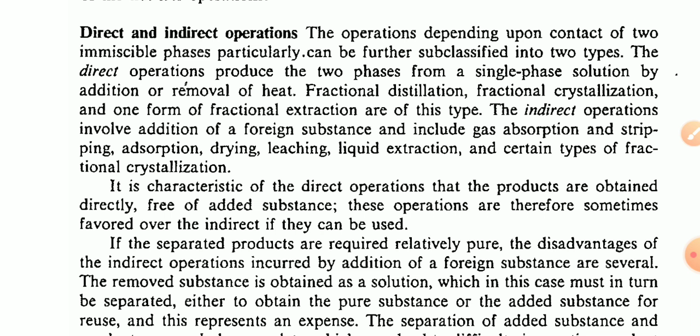It is characteristic of the direct operation that the products are obtained directly, free of added substances. These operations are therefore sometimes favored over the indirect if they can be used.

In any case, addition of foreign substances may add to the problems of building corrosion resistant equipment, and the cost of inevitable losses must be borne. Obviously the indirect method is used only because it is, in the net, less costly than the direct method, if there is a choice. Frequently there is no choice, it will come down to the basis.

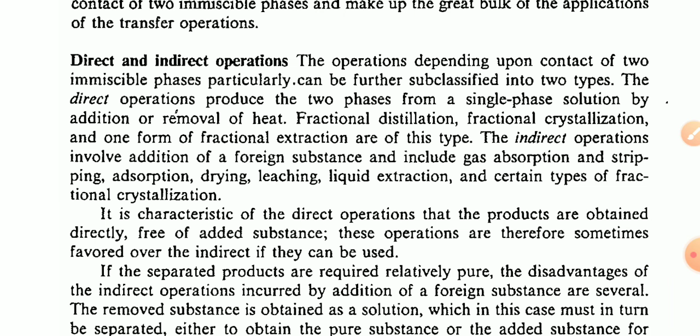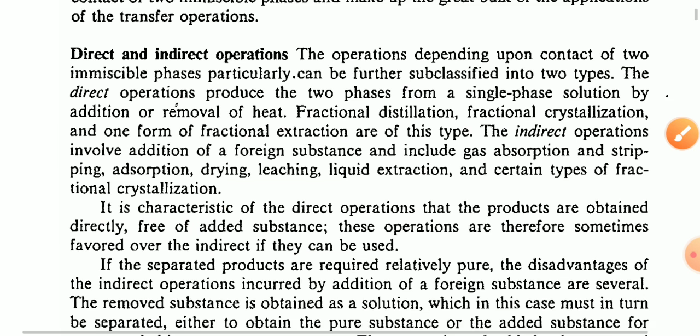And the drying, leaching, liquid extraction, certain types of fractional crystallization. It is characteristic of the direct operation that the products are obtained directly, free of added substance. These operations are therefore sometimes favored over the indirect if they can be used in these processes.

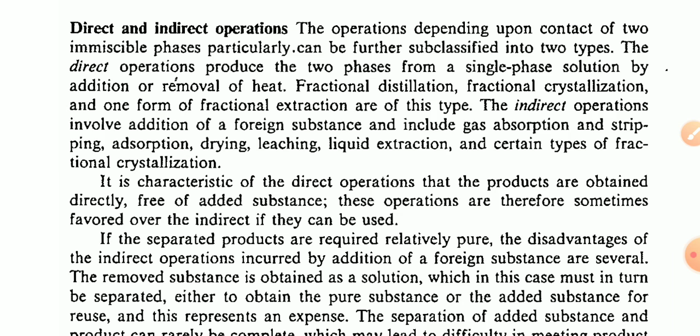If the separated products are required relatively pure, the disadvantages of the indirect operations are incurred by the addition of some foreign substances, and the removed substance is obtained as a solution, which in this case must be separated, either to obtain the pure substance or the added substance for reuse, and this represents an expense.

The separation of added substances and the product can rarely be complete, which may lead to difficulties in meeting product specifications. In any case, on this basis, we will need to work.

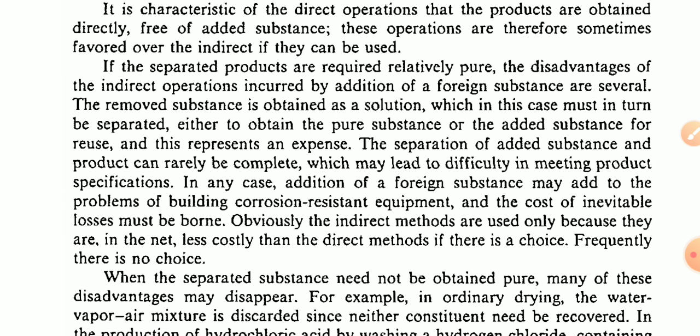Addition of foreign substances may add to the problems of building corrosion resistant equipment, and the cost of the inevitable losses must be borne. Obviously, the indirect methods are used only because they are net less costly than the direct method, if there is a choice. Frequently, there is no choice. When separated, some substances need not be obtained pure. Many of these disadvantages may disappear, for example in ordinary drying operations, where the pure water vapor-air mixture is discarded since neither constituent needs to be recovered. In the production of hydrochloric acid by washing a hydrogen chloride containing gas with water, the acid water solution is sold directly without separation.

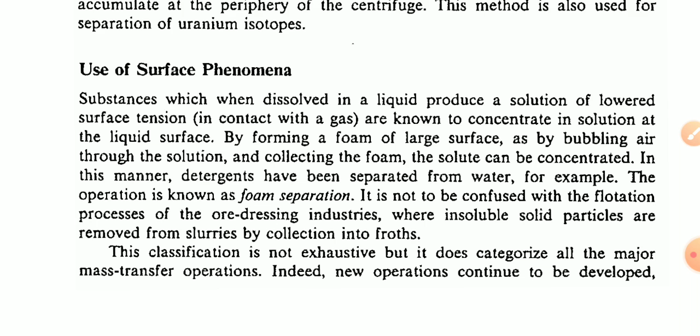This classification is not exhaustive, but it does categorize all the major mass transfer operations. Indeed, new operations continue to be developed on these bases, some which can fit into more than one category.

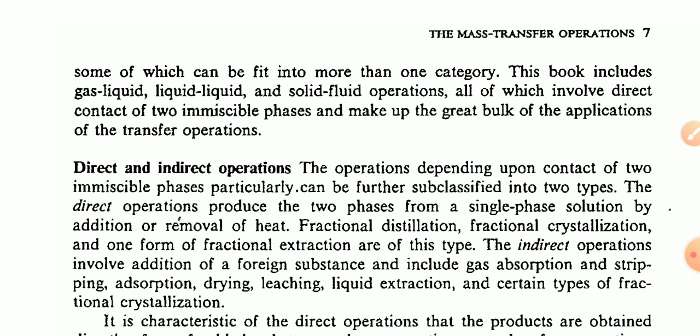The operations depending upon the contact of two immiscible phases can be further subclassified into two types. Direct operations produce two phases from a single phase solution by the addition or removal of heat, such as fractional distillation columns, fractional crystallization, and fractional extraction.

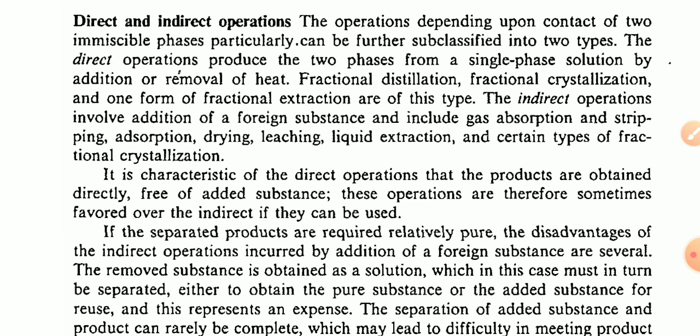Now, the characteristics of the direct operation: products are obtained directly free of added substances. These operations are therefore sometimes favored over the indirect ones if they can be used, as the separated products are required relatively pure. The disadvantages of the indirect operation, incurred by the addition of foreign substances, are several. The removed substance is obtained as a solution, which in this case must be separated either to obtain the pure substance, and we will see the difficulties faced in building some corrosion resistant equipment.

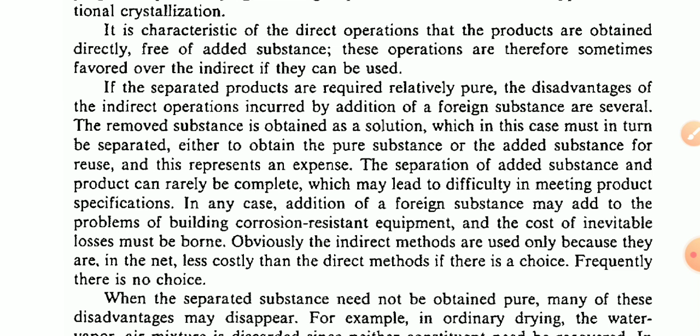Frequently, the choice of separation method is no choice at all, on this basis. And when the separated substances need not be obtained pure, many of these disadvantages may disappear. For example, in ordinary drying, the water vapor mixture is discarded since neither constituent needs to be recovered, as in the production of hydrochloric acid by washing with water. Okay, thank you so much.